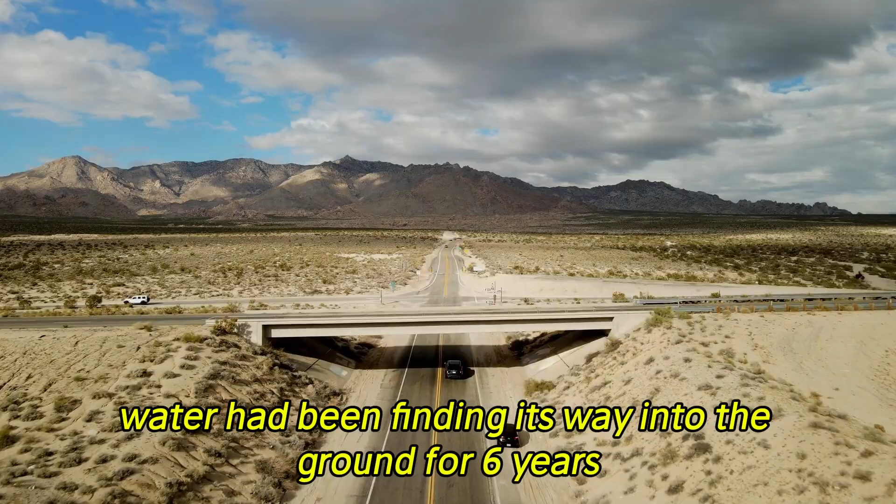Somewhere under a Colorado highway, water had been finding its way into the ground for 6 years before anyone knew there was a problem. Not a leak anyone could see. Not a crack in the road surface. Just water moving through soil, doing something slow and invisible directly beneath thousands of cars a day, until December 2019,

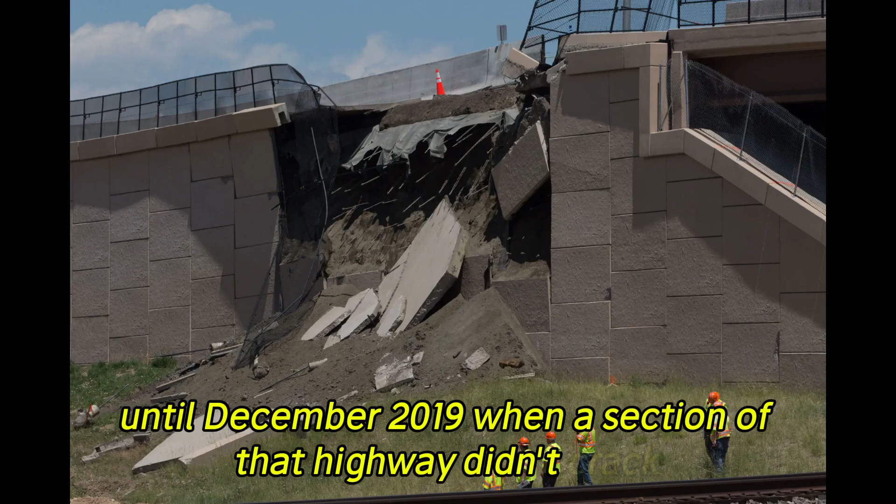when a section of that highway didn't crack, didn't sink gradually, didn't give drivers any warning at all. It came apart. Every driver who crossed it the night before had no way of knowing the ground underneath them had already stopped being reliable. Here's the part that should bother you.

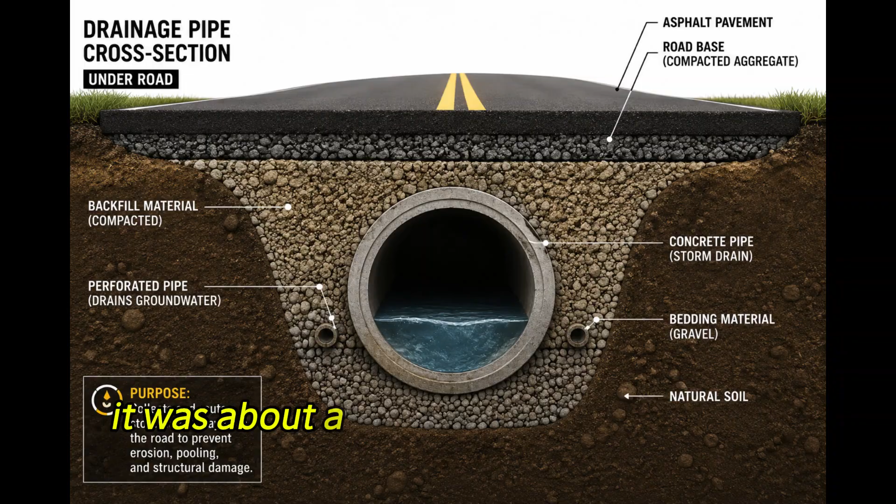When investigators finally explained what happened, the story wasn't about a flood, or a storm, or bad luck. It was about a drainage system that was never built correctly in the first place, installed by a private company that designed its own solution, signed off on its own work, and got paid for a highway wall that was already failing before the first car ever drove over it.

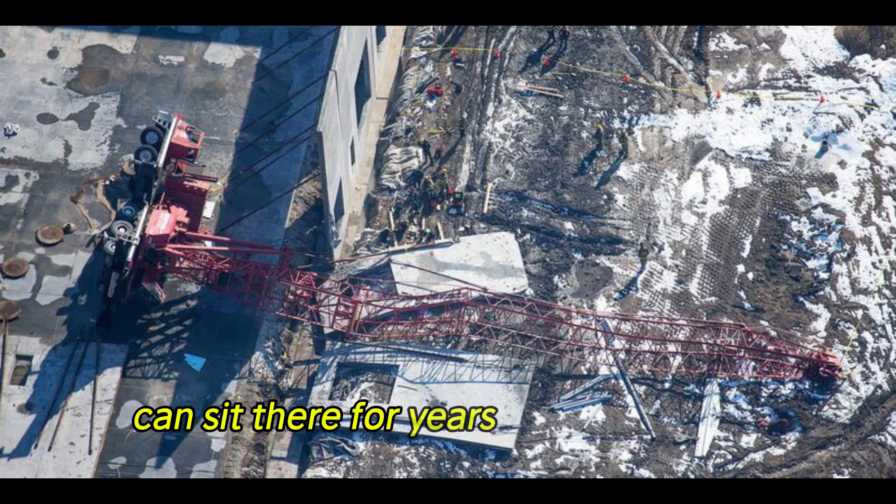Nobody caught it for 6 years. Not the engineers who built it. Not the state agency that approved it. Not the drivers who used it every single day. This is the story of how a shortcut buried in the ground can sit there for years, get driven over millions of times, and then choose one morning to stop holding.

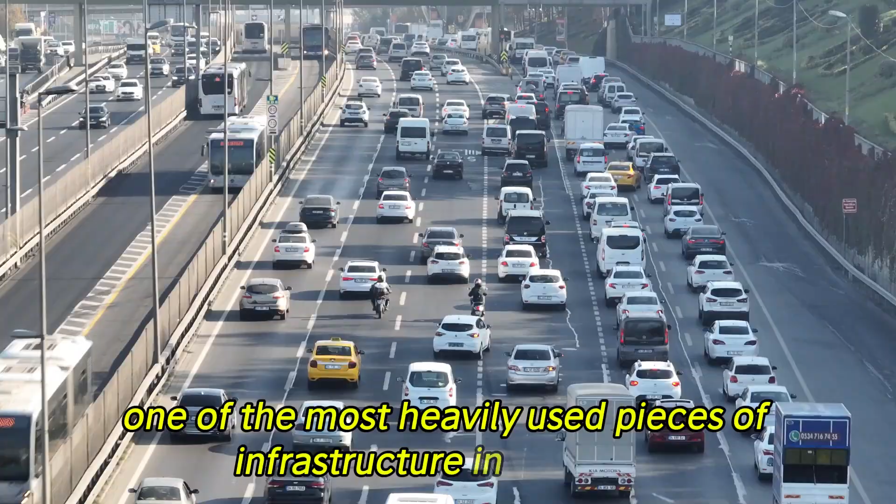US 36, also called the Boulder Turnpike, is one of the busiest corridors in Colorado. A direct line connecting Denver to Boulder, carrying tens of thousands of commuters every single day. Not a forgotten backroad. One of the most heavily used pieces of infrastructure in the state, which is exactly what makes what happened near Church Ranch Boulevard so unsettling.

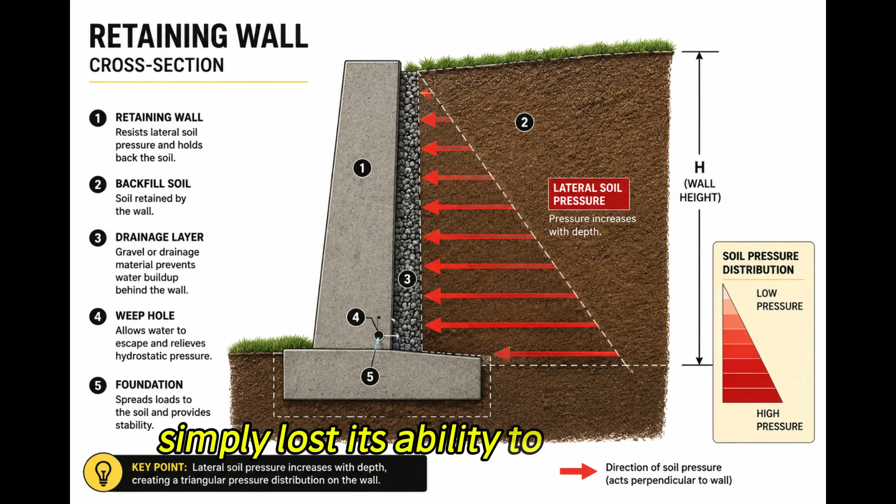In December 2019, a massive section of the embankment carrying the highway over a set of railroad tracks collapsed. Not a pothole. Not a crack that spread over weeks. A retaining wall that had been holding tons of soil and roadway in place simply lost its ability to do that job, and the ground it was supporting gave way.

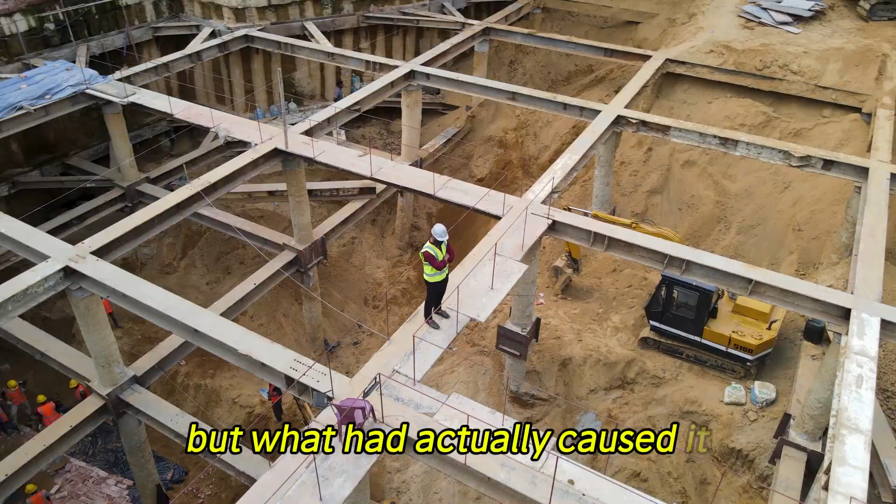The road had to close. Traffic that normally moved freely between two of Colorado's biggest cities was forced onto detours for months, while engineers worked out not just how to repair the damage, but what had actually caused it. That second question turned out to be far harder to answer than anyone expected. It would take until 2021, almost 2 full years later, for a real answer to surface.

The Colorado Department of Transportation commissioned an independent engineering firm, CTL Thompson, to investigate. What came back was a 34-page report, backed by more than 280 pages of appendices, all assembled to answer one question. Why did a wall built to last decades fail in under 6?

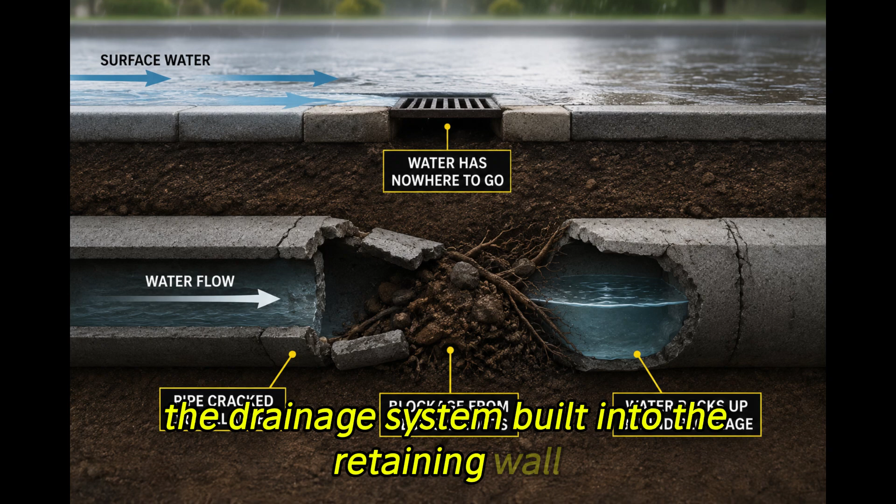The drainage system built into the retaining wall had never been properly designed or installed. Its job was to move water away from behind and beneath the wall. When it couldn't, that water went down instead into the clay soil underneath and stayed there.

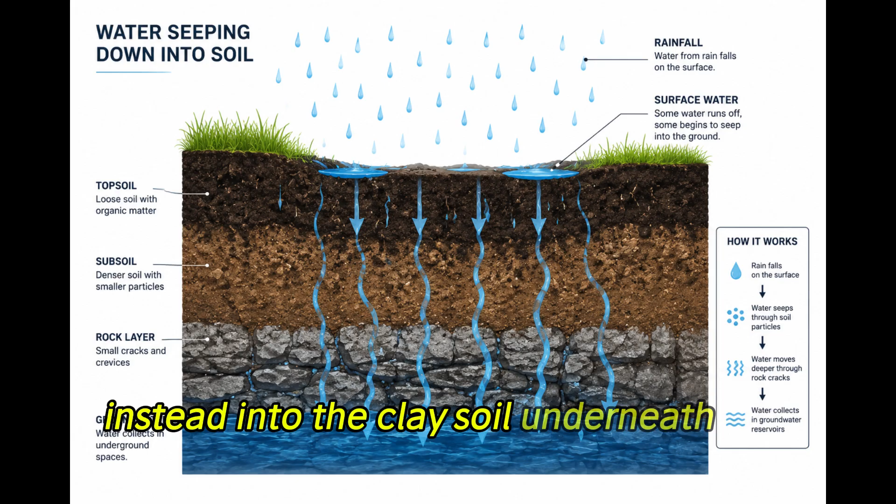Here's the strange part. Clay doesn't fail the way most people picture ground failing. It doesn't crack, doesn't visibly shift, doesn't show a warning sign at the surface. It just quietly loses shear strength, its ability to resist sliding under load, the wetter it gets.

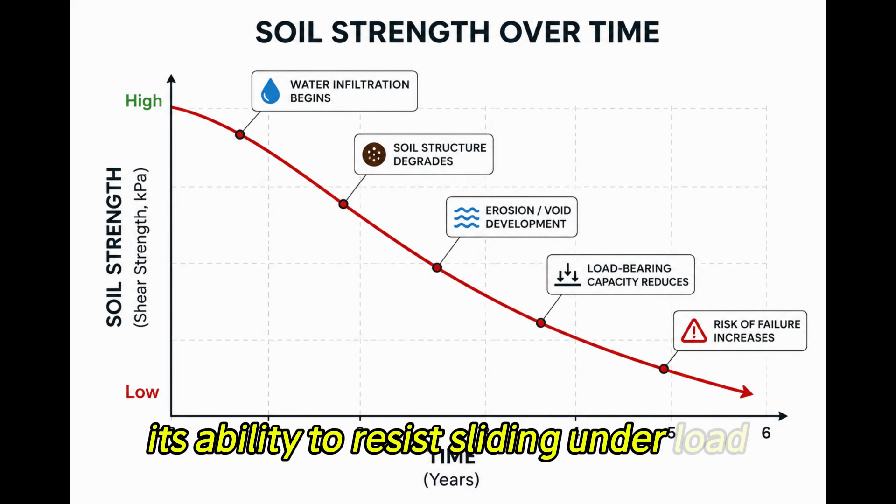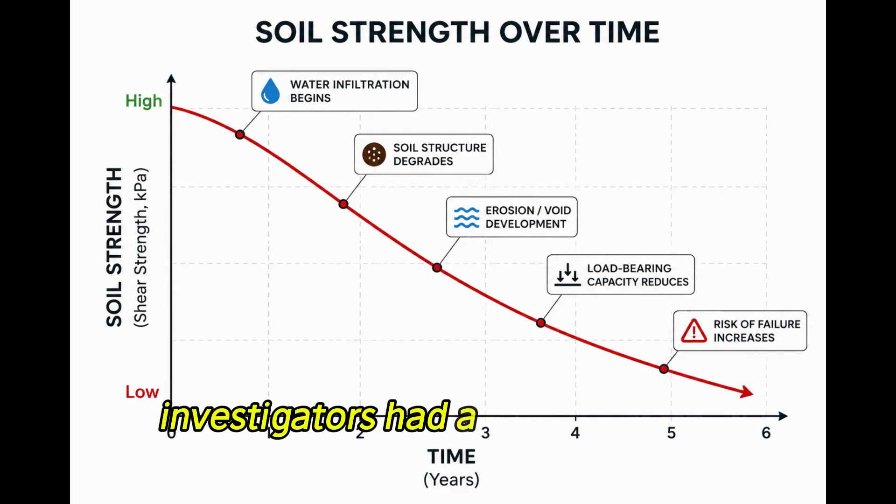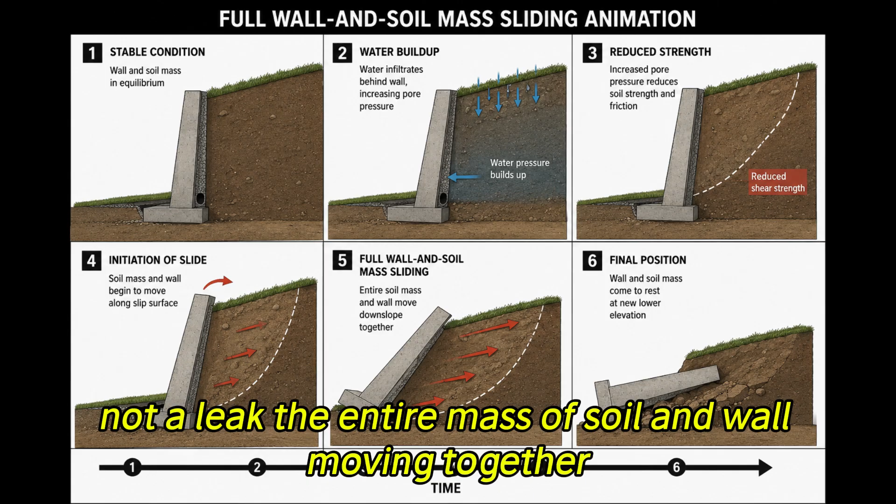A wall built to sit on stable clay was, for years, sitting on clay being slowly turned into something the design never accounted for. Investigators had a name for what happened once that weakening reached its limit: global stability failure. Not a crack, not a leak, the entire mass of soil and wall moving together because the ground beneath it could no longer hold the shape it was built to hold.

The report reached back even further than most coverage at the time realized. It pointed to a specific event 6 years before the wall failed that may have set the entire process in motion.

In September 2013, the Front Range of Colorado was hit by catastrophic flooding, the kind of rainfall researchers would later describe as producing roughly 1,000 years' worth of erosion in a matter of days. That flooding hit directly during construction of the retaining wall. Rain fell straight onto an active site on ground that wasn't finished, on a drainage system that wasn't yet doing its job, if it had ever been built to do that job correctly at all.

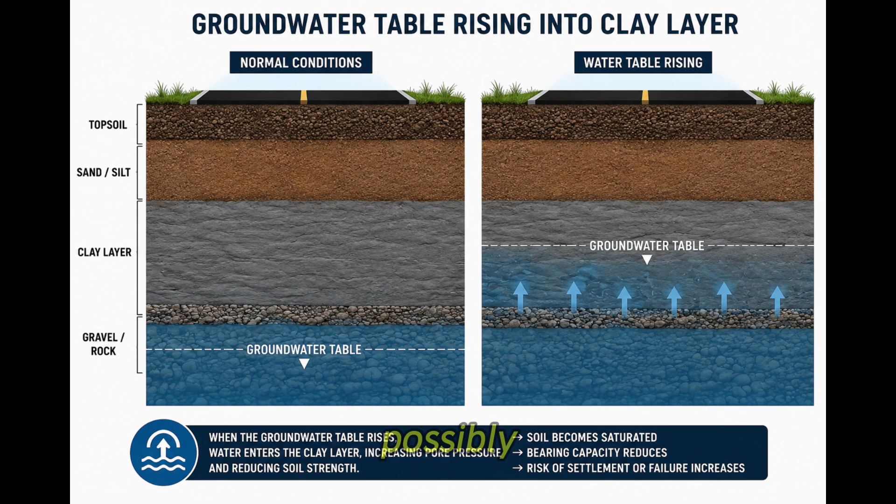CDOT's own chief engineer wouldn't hang the entire blame on that one flood. He raised another possibility, that groundwater near the site could have been slowly pulled into the clay over years, achieving the same effect independent of any single storm. Two separate paths, a historic flood and years of ordinary groundwater movement, possibly both working toward the same outcome from different directions. Either way, the wall was compromised from early in its life. It just took 6 years of traffic and time for that to become impossible to ignore.

This is the part that should unsettle anyone who assumes the road under them has been checked by people who know what they're doing. The wall wasn't built through CDOT's traditional process, where the state designs a project and hires a contractor to build exactly what's specified. It went through a design-build contract, a model where a private company handles both the design and the construction, submits its own plans, and is trusted to deliver a finished product that meets standard.

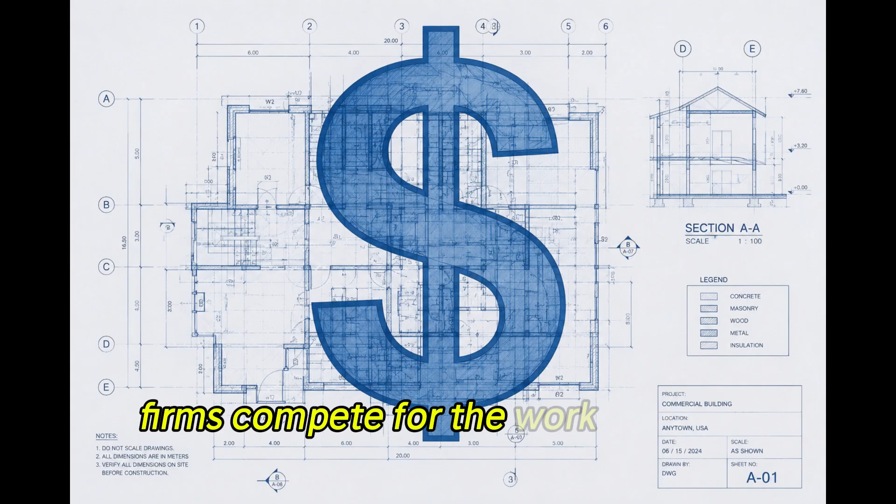Design-build exists because it saves money and time. Firms compete for the work partly by proposing cost-efficient designs. That can be a legitimate advantage. It can also be exactly the pressure that leads a company to cut a corner nobody's positioned to catch, because the same company designing the solution is also the one building it, with limited independent verification of whether their innovation quietly took on more risk than it should have.

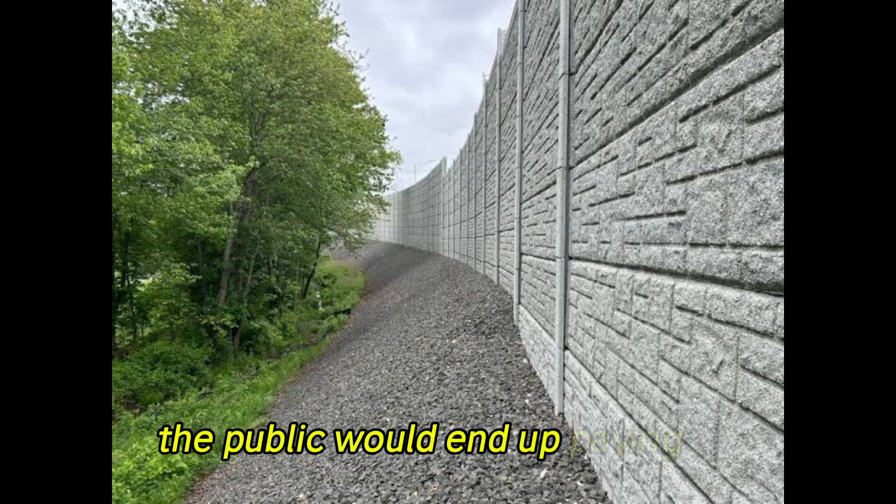CDOT's chief engineer said as much once the report landed. The agency needed a more critical eye on design-build documents going forward to make sure a contractor's cost-saving idea wasn't secretly a structural gamble the public would end up paying for. That's the shortcut. Not visible. Not something anyone could catch on a walkthrough. A decision buried in drainage specifications, made by a company motivated to deliver under budget, reviewed by an agency that trusted the process more than it verified the outcome.

CDOT spent $17.6 million repairing the highway, months of detours, months of a major commuter corridor running at a fraction of capacity. In August 2021, almost 2 years after the collapse, CDOT reached a $14 million settlement with the contractors responsible for the original design and build. Not a decade-long court fight. Not a case where blame stayed murky. A settlement, the closest thing this story has to an admission that once the evidence was laid out across 34 pages and 280 appendices, the people who built the wall knew exactly where the failure traced back to.

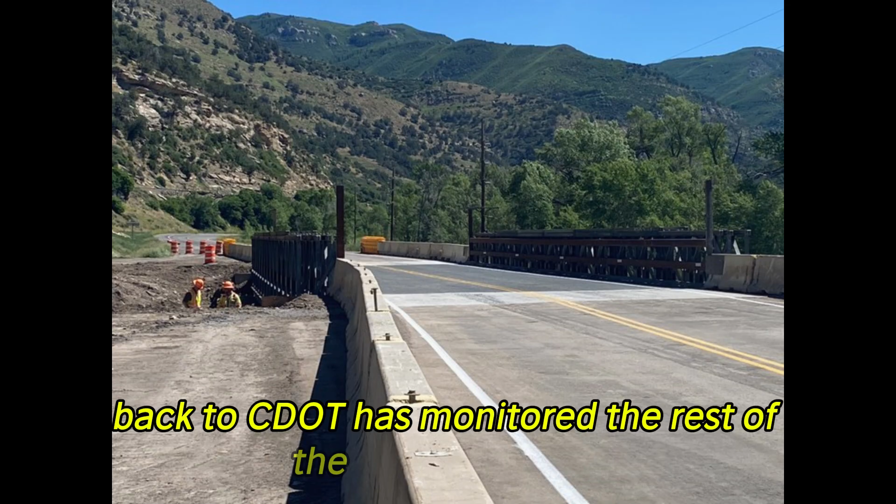CDOT has monitored the rest of the wall ever since. It hasn't moved a millimeter since the repair. Officials call it a one-off. Maybe it is, for this particular wall. But the pattern underneath it isn't unique to Colorado. Drainage systems sit buried and unverified beneath retaining walls anywhere roads climb, cross railway lines, or hold back sloped ground. Design-build contracts run on infrastructure projects across the country on the same trust-the-process model that let this one slip through for 6 years. Most of them are fine.

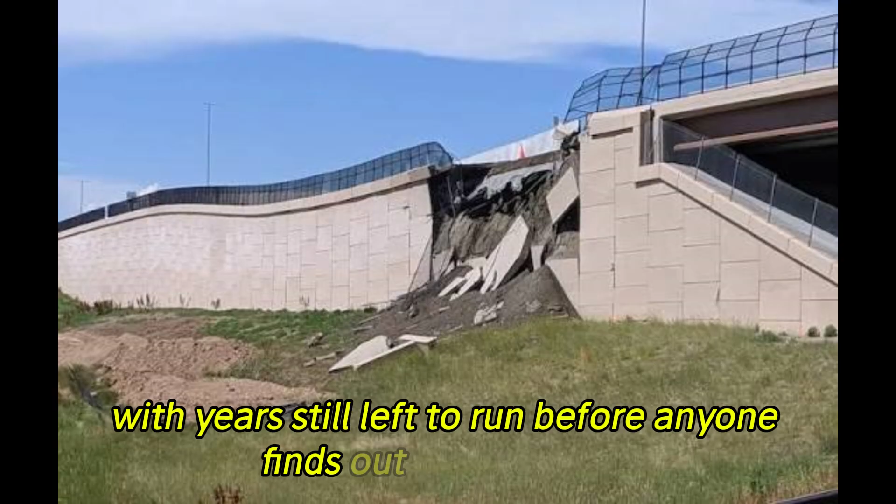But somewhere, on some stretch of road being driven right now, there might be a version of the same story already in progress. A system quietly failing to do its one job, with years still left to run before anyone finds out. The wall on US 36 didn't fail in December 2019. December 2019 was just the day the water finally won an argument it had been having with the ground since 2013.